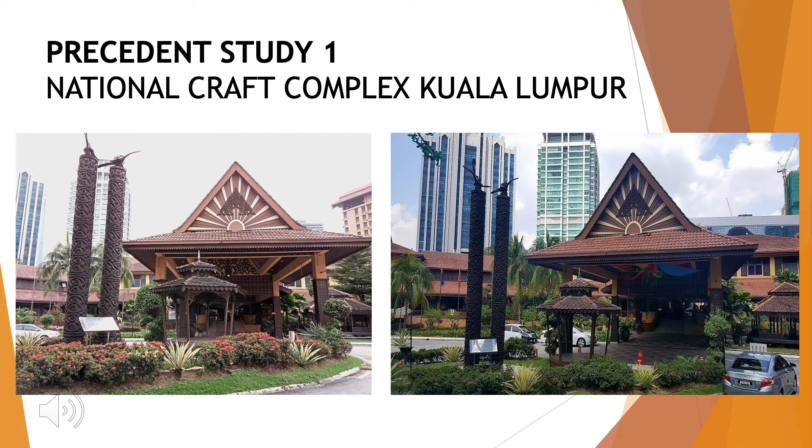The first precedent study I took is the National Craft Complex, Kuala Lumpur. The centre offers the look of nature with the use of timber and a facade that describes the culture of Malaysian people. It also shows the aesthetic of our local craft with unique designs on the walls and spaces.

Next is the Cobram Library and Learning Centre. The facade and the use of materials offer sustainability. The choice of facade materials, timber strips, allows only part of the light to enter, acting as sun shading and an aesthetic feature. It also focuses on the space inside, which is the learning centre for the students there.

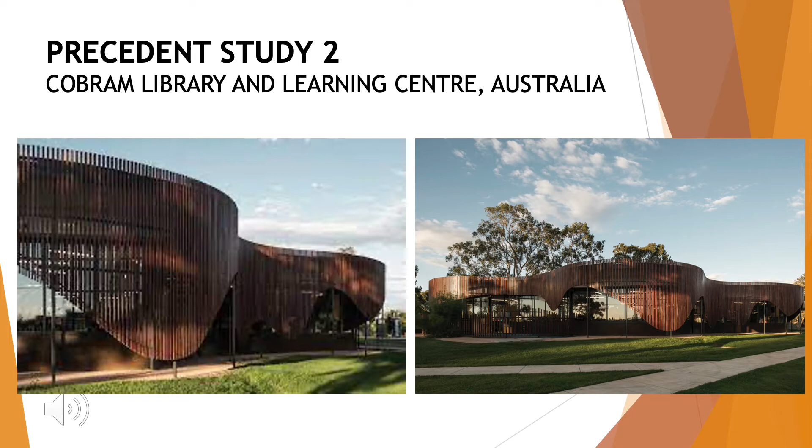As a craft and art centre for batik, another design consideration is a facade design that reflects the art of batik itself, so that whenever a visitor drives past, they will know what the building is for. As this batik centre is inspired by a batik motif called Awan Larat Badak Mudik, the facade follows the curvy shapes of the motif. To make it more interesting, the facade integration can be applied at different spaces, like in precedent study 2, the Cobram Library.

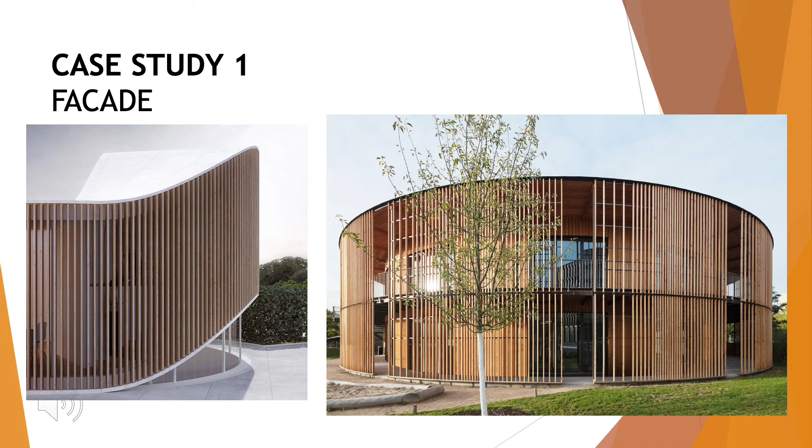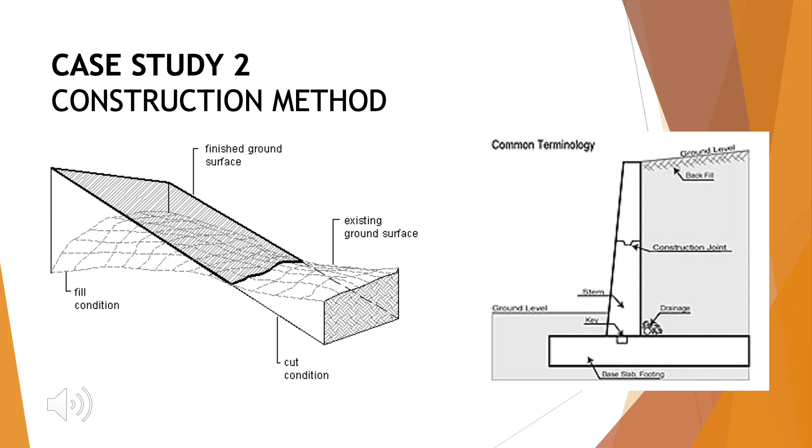The next case study taken into consideration is the construction method of cut and fill, a method of removing or adding uneven soil. As my site is more of a slopey area, cut and fill will help level the ground, together with the application of a retaining wall that supports the building as the foundation.

My design concept is inspired by the literal shape of one of the batik motifs, Badak Mudik, which relates to and describes the word 'blending with nature' with curve as its language. As our client likes to bring nature near her, the natural blending motif will bring her closer with trees all around the building. The curvy area focuses on maximizing the view with glasses around, exposing visitors to the beauty of nature itself.

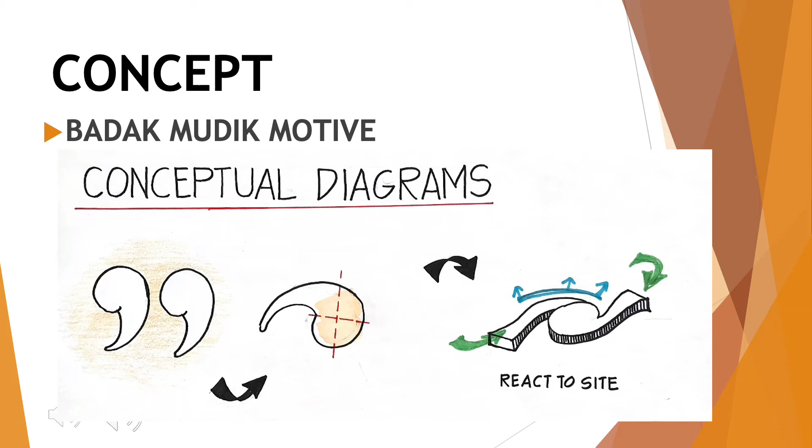Our client also wanted to be seen as someone mysterious who has a lot in store to offer other people, especially her skills in batik making. The name Chamber itself brings out that side of her, making people curious and wanting to know more about the centre.

Moving on to the bubble diagrams, I have separated the spaces into three main areas: public, semi-public, and private spaces. The spatial organization of the building is a linear organization. Though it has a curvy language, I would want visitors to enjoy the whole building right from the start until the end, to know what we offer inside.

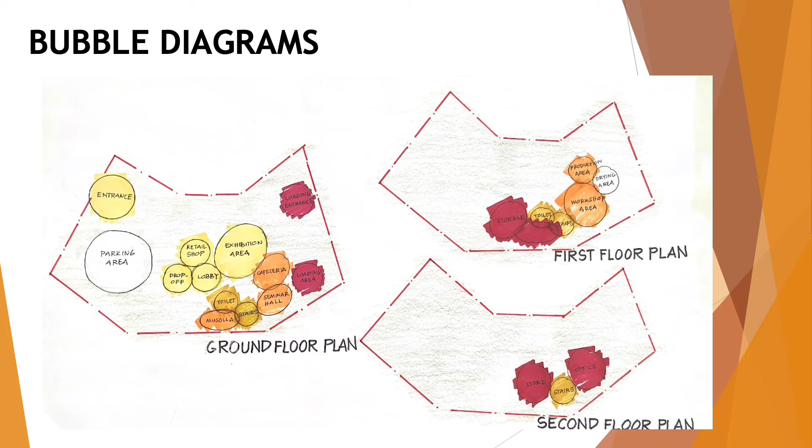Moving on to my floor plans, my site has two entrances: one is the main entrance to welcome visitors, and the other is for services. The service access is for loading trucks or cars to enter, usually scheduled early in the morning or late evening to load goods or pick up garbage.

As visitors enter the site, they go along the two-way road which leads to a roundabout for dropping off visitors. There are priority parkings at the left side of the site, located nearer to the building.

As visitors enter the lobby, they can either go straight to the retail shop or to the exhibition area, which offers the artwork of batik maker Farah Mohan. Going into these spaces will then lead you to the next space, which is the cafeteria.

There are two parts of the cafeteria: one is open with tall glass windows, while the other is closed, offering privacy.

While people are going around the building, there is a small courtyard in the middle which people can see and go out from inside to outside, just to sit around and talk. To relate to the culture of Malaysian people who enjoy spending time talking with one another, this open space will make the art centre more lively.

Next to the cafeteria is the seminar hall, for semi-public use when there are students or visitors who need briefing and presentations.

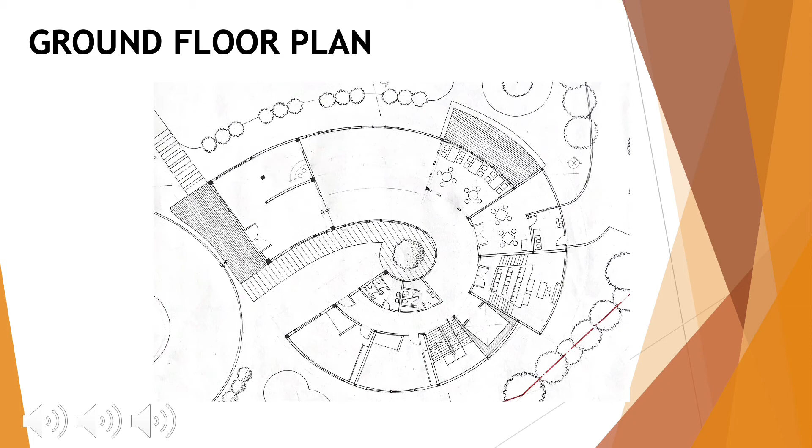It is best to have large openings to provide natural ventilation for everyone.

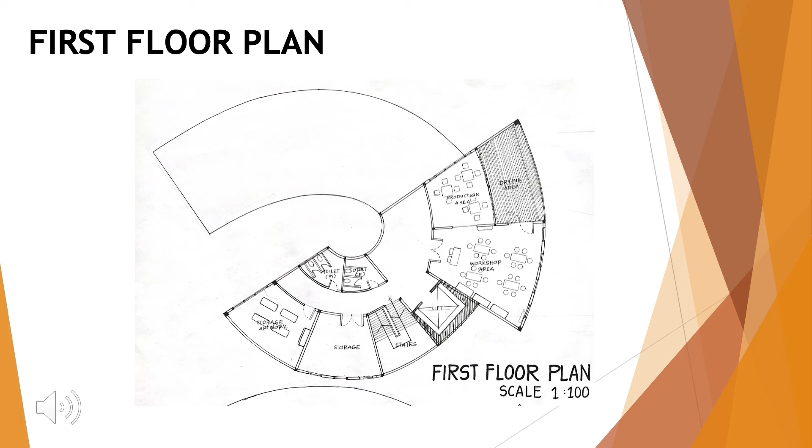The toilets go from the ground floor to the second floor, located in front of the storage room. On the second floor, there is an office for the staff and a small pantry provided to ease their work.

The sections show the cut sections of the buildings, indicating the materials used. They also show the level difference of the spaces. The material I use for my building is concrete.

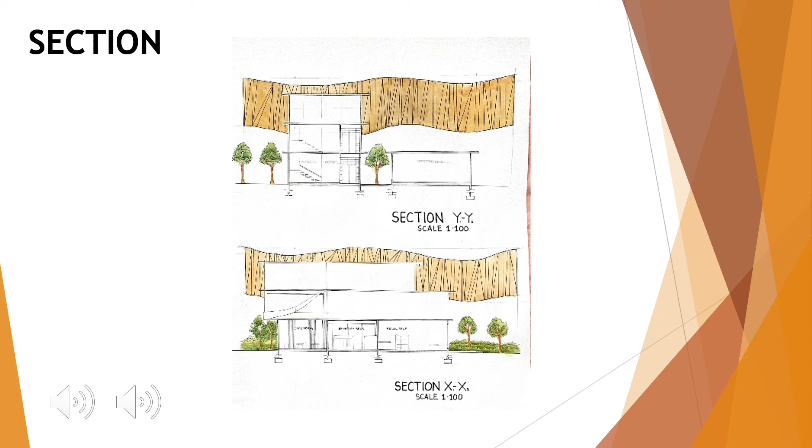The elevations show the facade used for this design, which includes timber strips on the exhibition area acting as a shading device, as it is a space that is exposed to sunlight.

It also highlights the space as the main space out of all. The curvy facade also shows the integration between the building concept and design as a whole.

Colors used for the building are neutral colors, which mimic the colors of nature, in order to make the building more welcoming and friendly with its surroundings.

Having tall windows all around is to focus on making the building sustainable. With large openings, it will allow natural ventilation and help the building gain natural lighting too.

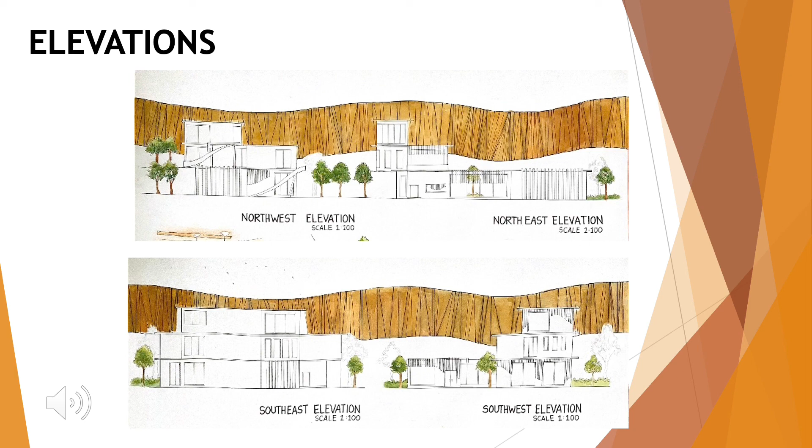This is my final model to show the facade being used in this design.

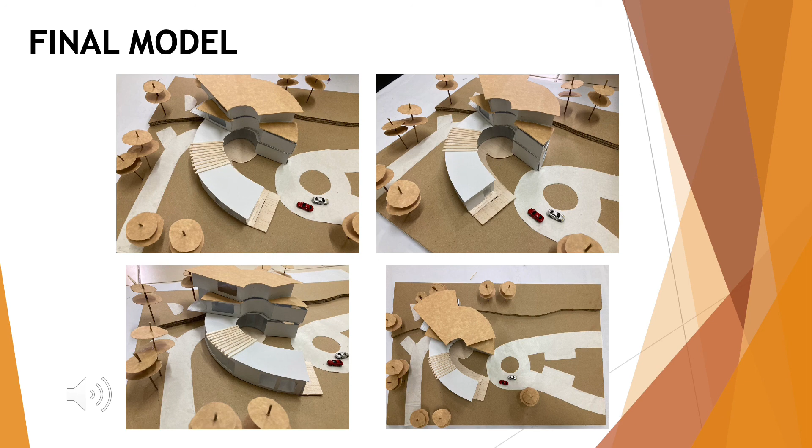In conclusion, we should always remind ourselves that artistic values should never go beyond their boundaries. For example, the use of faunas, which is a controversial issue in Islamic value, should be taken seriously. Going artistic does not force one to go over the limit as a Muslim.